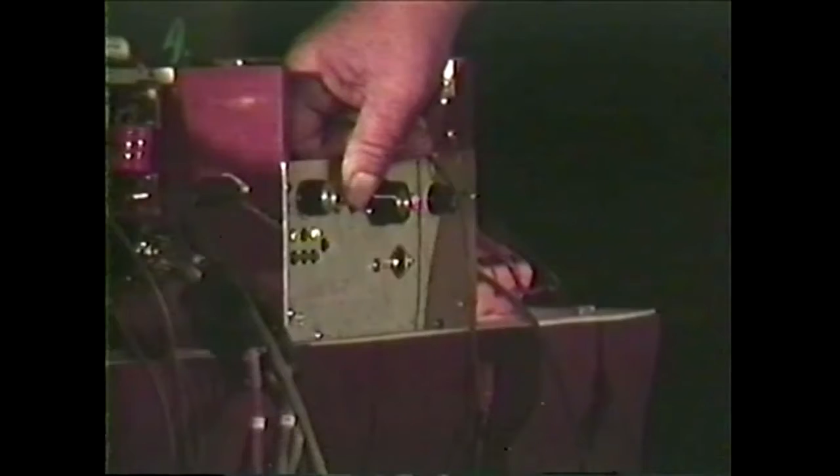And it will reverse at 6,000 RPM, but if it isn't bolted down, it'll jump up in the air 6 feet. I know, I had a neighbor come in and I had it running at 6,000 and he flipped the switch accidentally, and the motor was up in the air and I was catching the motor with it running and trying to shut this down at the same time. It wasn't funny.

Anyhow, with this design, there's no brushes in the motor. There's only 2 things in there to wear out, and that's the two bearings. The bearings I put in there cost $7.90 a piece, and they're 10,000-hour bearings. Now, in a car, how far would you drive in 10,000 hours? The motor is designed so the bearings are easy to replace without having to get into the working parts of the motor. It's not that technical.

I tried to follow the old saying, keep it simple, stupid. Well, I tried to make it as simple as possible. Ease of maintenance and maximum efficiency. And there may be better motors. And I can improve on this. This is my first prototype. I made a mistake in this one.

I wanted 49 slots in here. And the draftsman, the computer guy that's done my CAD work for me, he marked on the print 49 slots. I didn't count them. I faxed it off to Lamonics, and Lamonics made me 48 slots. And that's why it growls. If the 49 slots were in there, it would be as smooth as could be. So that's an error, and I own up to the mistake because I didn't count the slots.

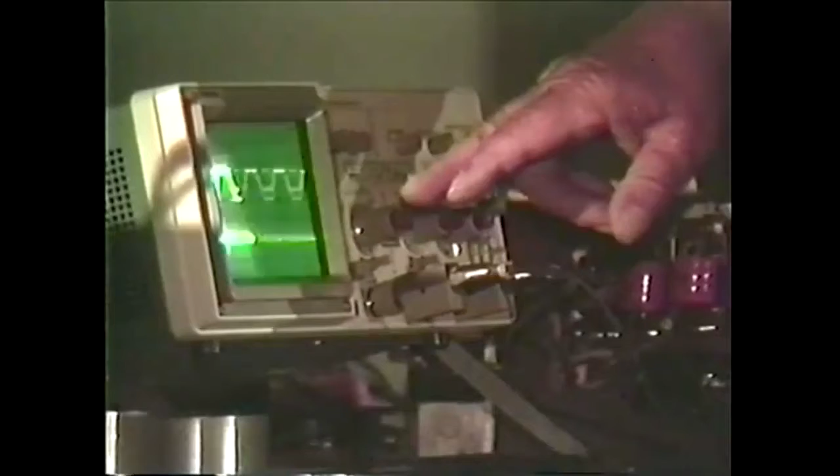Now, let's see here. Now this is on 50 volts per division. I'll bring this down to the line. And we're putting in about 80 volts now, that it's showing there. This line here is hooked across a .002 shunt. And I'm set on 20 millivolts per division. And so that is indicating the amperage going into the motor.

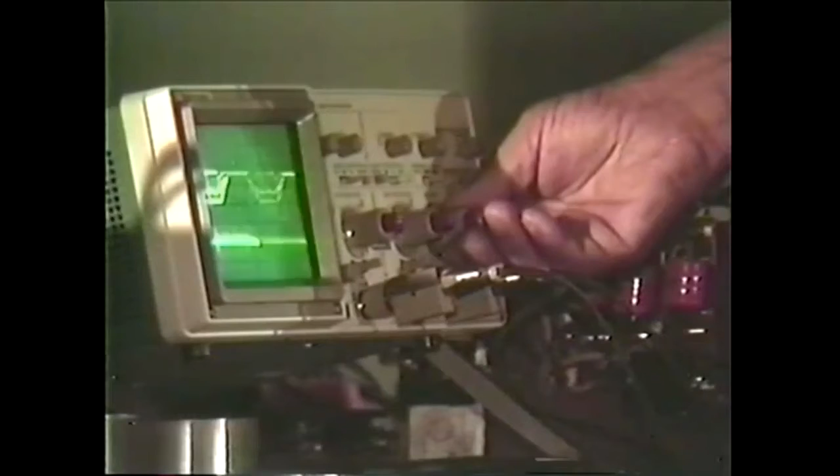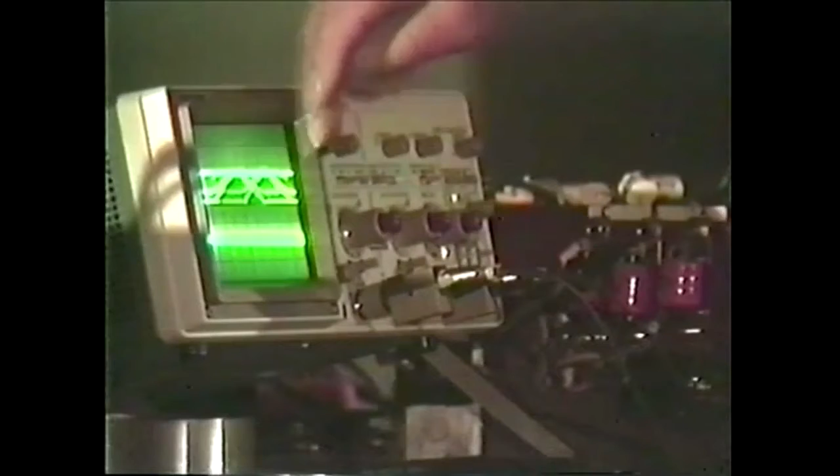Now, we'll turn this over here a little bit. Now you can see the little pulses I'm putting in. Very small amount of amperage I'm putting in. I'm getting as much back. We'll put this on 0. Get it as accurate as possible for the perfectionist. Now, these pulses that are going in are very short in duration.

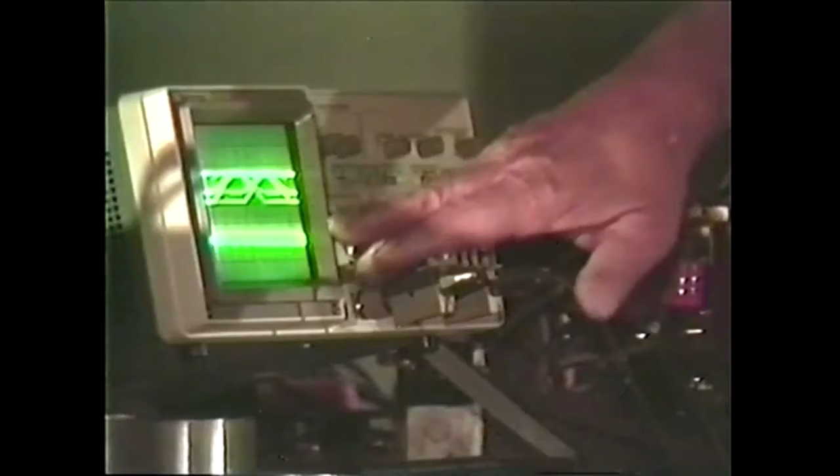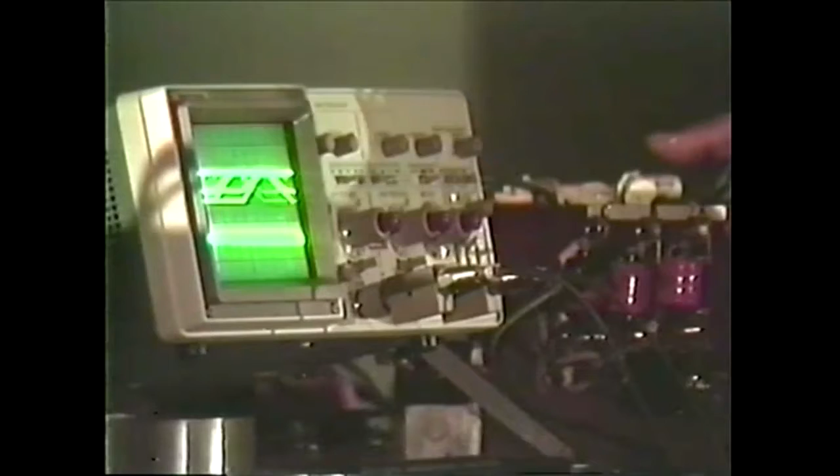These back EMF pulses down here are wider, actually, than the forward EMF pulses. Everything below the line, I'm capturing in these condensers here to use in the next pulse, so that I don't need to take quite so much electricity out of the battery.

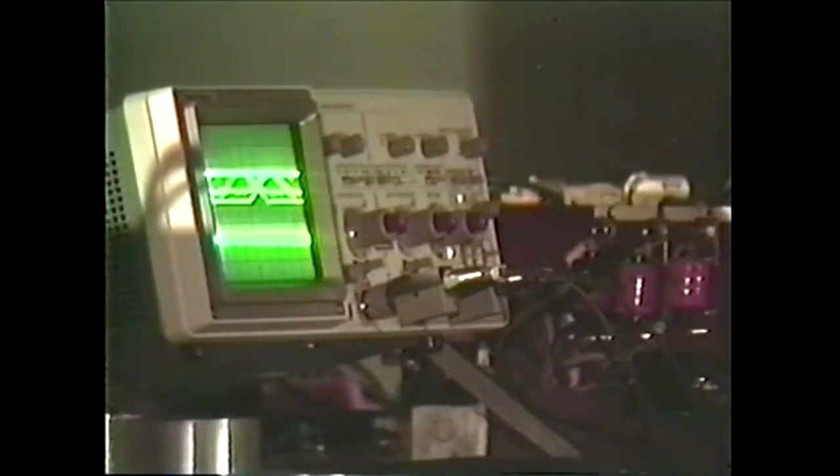Now, this motor is equally as good a generator as it is a motor. Now, I'm going to shut the power off going in. And you'll notice a sine wave, but the sine wave, as it slows down, collapses. And we're just hooked on to one phase of the three-phase.

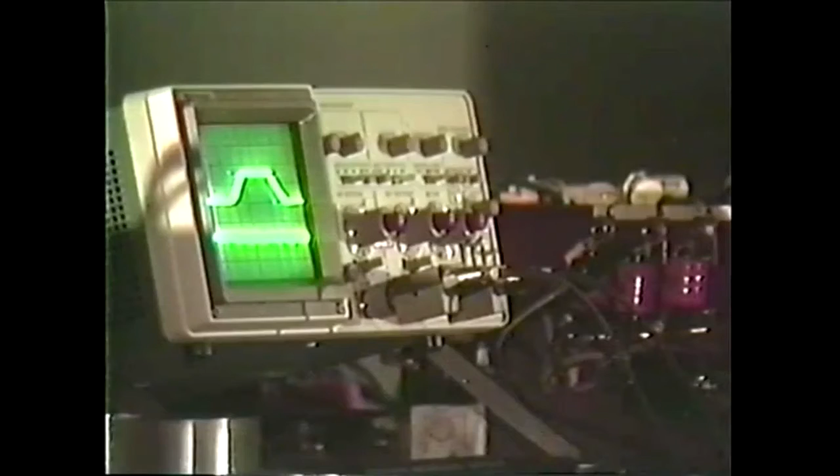Find a quiet speed so we can talk.

But I designed this basically for electric cars because of the torque. The torque is unlimited in instantaneous torque. It's there. I have run it long term for heating tests. I had a party that said, oh, if you put the power into that seal, see, it's sealed, airtight, no dust, no magnetic filings, nothing can get in there.

And I didn't have the shroud on it, and I didn't have a fan on it. I run it without any cooling, with 2100 watts going in for 4 hours, and it was still cold. It does not heat. But it looks nice with the cover on there, and it keeps something from bumping my Hall effect switches on the back that control this. In the finished product, it would be built a little bit neater than that. As I say, this is a first-time prototype.

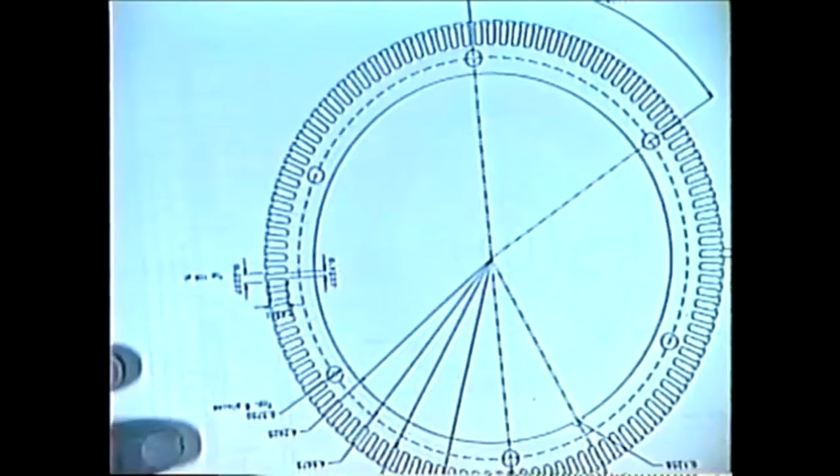So the less iron I can use and still have the iron... to get high torque you have to have some iron. An ironless motor, I've got ironless motors at home, have no iron at all. They run beautifully, they're very efficient, but they're not a high torque motor. They're like third horse, quarter horse, and they will work very nicely at that rate. But if I tried to go to a car motor, I have to have some iron to get the torque.

And to increase the speed, I reduce the iron to the minimum so that I don't waste energy. Anytime that you're going to shove energy into a piece of iron and you have to put more energy in it than is necessary, you're wasting something. And the other thing that I looked at in working in the Navy with submarines and all the different types of electronics, some of it was secret at the time.

Anytime that you can take X number of watts and make it do 2 jobs for you at the same time, getting from point A to point Z, and it does 2 jobs on its way there, you're coming out ahead. But if you take so much and do 1 job, and then you take so much more and do another job, when you can make the same supposed electrons do double work at the same time. So that's why I tried to make it as efficient as possible, get the mileage on electric cars up to 200 miles.

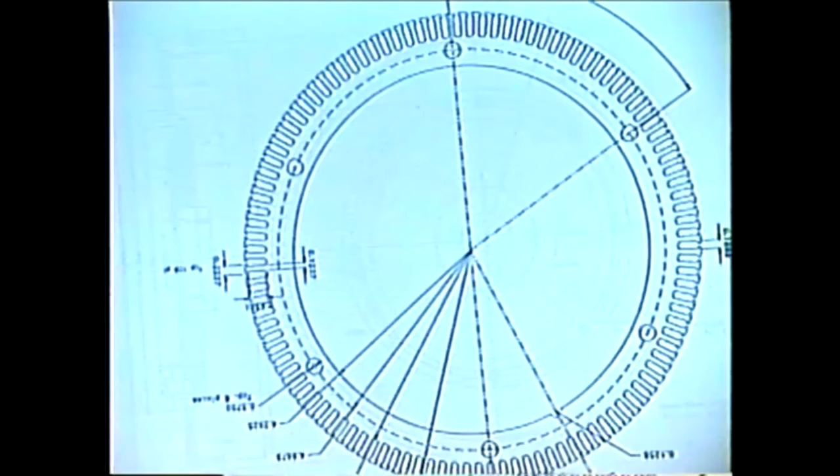There's a couple of innovations in this. The next one to build will be more efficient than this one. The 50 horse there is designed for very simple construction. If I want 100 horse, I take the same stator, wound left hand, and it goes in the same motor. All the parts are universally designed so I can have a 50, I can have 100, or I can go to a 200, using the same stator plate. I don't have to make a multitude of different sizes, like this design here.

I can wind this to get 10 horsepower. But if you want a horse and a half, why, boy, we can make it super efficient at a horse and a half, same size frame and everything. And it's not any bigger, and it's not as heavy as a conventional horse and a half if you went and bought one.

So we don't have to have so many different models, having every one of them different. And as I hate to see waste, I have rewound this motor at least a dozen times to do tests. I can wind it for 12 volts and it'll turn 6,000 RPM on 12 volts. If I put 24 volts on it with the same winding, it'll turn 10,000. And I have run it over 12 several times. The way it's designed, it's not going to fly apart.

I took it to Portland and put it on a dynamometer, and I got up to 3,500 RPM, and I'm going to kick it up a little higher. "Oh, no, it'll blow up, it'll blow up." And I says, I've turned it 10,000, it ain't going to blow up. I finally found out that his dynamometer would have blowed up. He didn't want me to turn my motor any faster, but I knew that 10,000 wasn't going to hurt it. And so then he conceded that he didn't want to blow up the dynamometer.

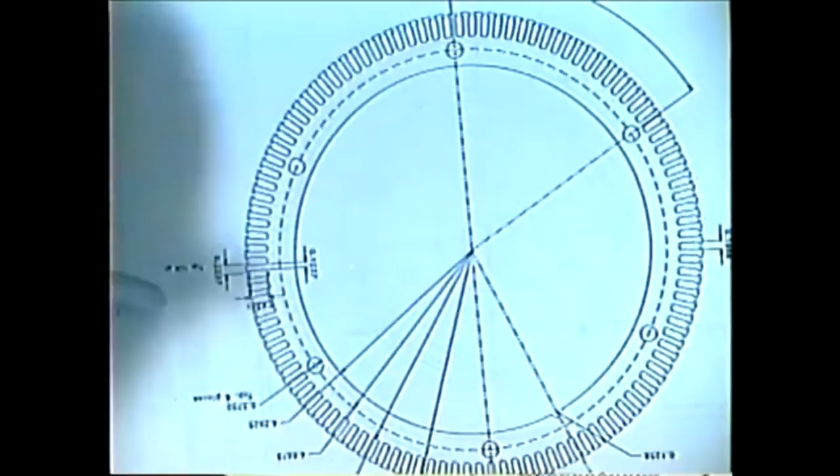Now this is the stator plate like I was showing you here, only this is the 49 slot. Where in that one I had the iron coming into here, I cut back on the iron because I found out I didn't need quite so much. I could get by with less iron between here and here and still have stability. I think we got a cross section there of this motor, and also one of the 50 horse. Now that's a cross section there of this motor here. There we go, by George.

Now, something that a lot of people don't know. I spent a considerable amount of time building Ecklinators. I invested $20,000 into John Ecklin's, I called it his folly. It was his dream. And John Ecklin was a brilliant man. He was a theorist. He never built the motor. We built it. It did not function quite like he thought it would. And I give him credit for being a good, sincere person. But he never built one that worked.

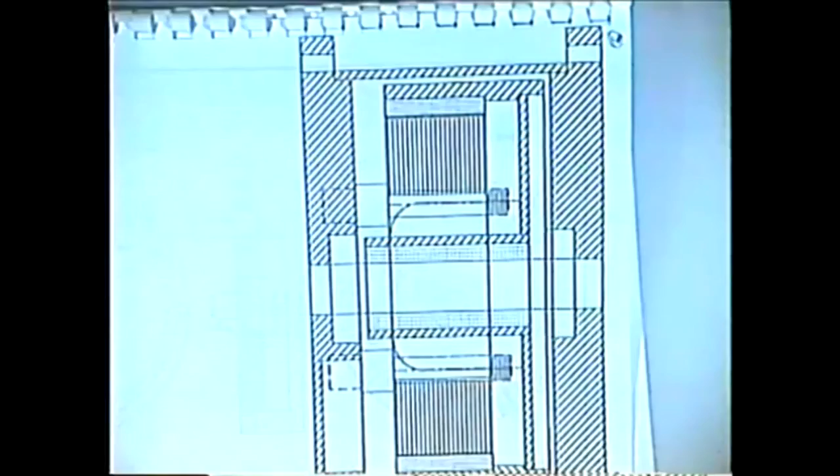And there were a lot of us, not only me, but a number of other people, who put a lot of money into Ecklinators. But I went a little farther. I got Hall effect switches, I got XY recorders, and I plotted the magnetic fields in the iron. What happens when this charge goes in? What happens when the power comes off? And we made charts and more charts.

And we found out that the magnetic field doesn't quite behave like everybody thought it did. Depending on the kind of iron you use, you can alter the behavior of it. We found that we could bounce magnetic fields off of magnetic fields, and they would expand and contract this way at the same time. And so we learned a little bit from it. So I don't dislike a gentleman that was working with me. He says, we wasted a lot of money.

And I said, well, look at it another way. If we went to college for 8 years and paid the tuition and everything to learn these things, we would have wasted a whole lot more. So we're paying for our education. And we're learning the hard way, but we learned.

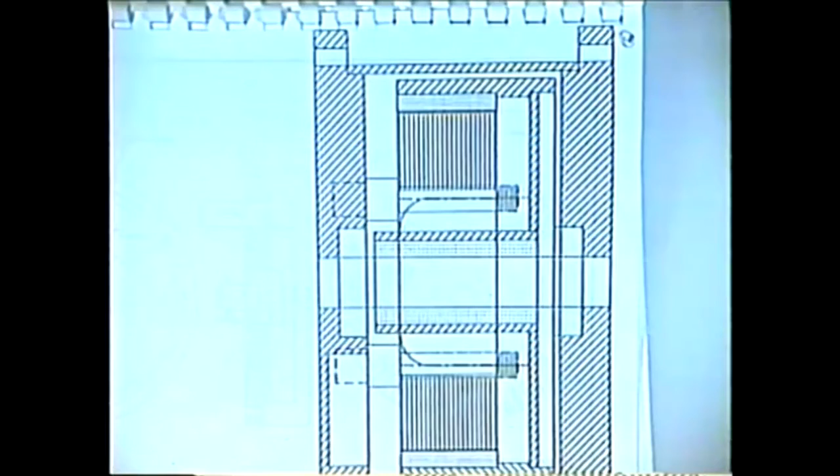And the Kato generator, for those of you that don't know a Kato generator, they are a brushless generator, one of the best type generators built for industrial use. The beggar's that big around and that long, and it puts out 37 kilowatts of 440 three-phase or 220 three-phase or 118 three-phase. I can get any voltage I want, and it's all three-phase.

And the reason I bought it is so that I could put a motor like this on it, and I could have three-phase power for my milling machines and everything, because the power company doesn't have three-phase power available where I was at. I'll be honest why I bought the generator. But it made a good test load for this when the gentleman that I was dealing with at the time wanted to know if it would get hot, how much power I could put in it, and what temperature rise.

So I put the temperature gauges on it, and I loaded it, and I let it run. And it never got any warmer in my hand in 4 hours of running.

And I think that... I can see right down the eye of that camera, and this is trying to blind me there. I was just being funny. I think we ought to take a little break here, and then we'll come back and answer what questions we can. You know, I'm normally not a talker, and it's awfully hard to try to get everything said and answer as many questions as might come up as I can. I like to build things, but I don't like to talk about them very much.

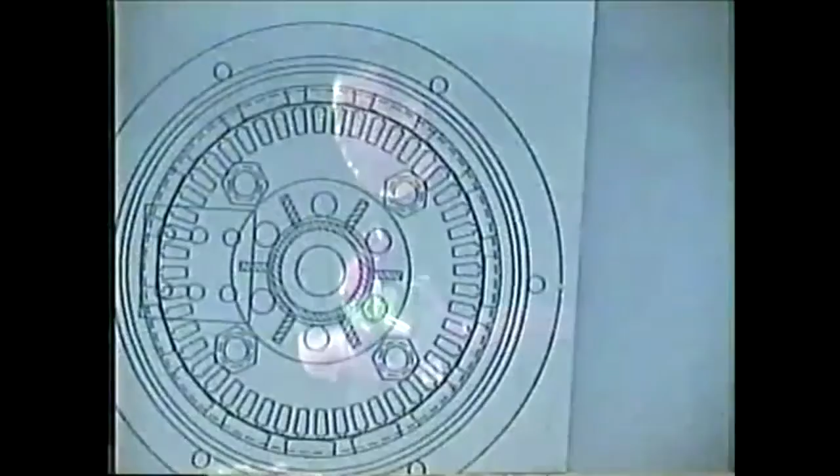It may be interesting someday to run it up, increase the RPM till the point it fails. But I'm very confident that 20,000 RPM wouldn't hurt it.

Go ahead. Yeah, Ron, how did you fasten the magnets to your cylinder? Okay, in fastening magnets, there is a company, I'm trying to think the name of it, that makes a bonding agent especially designed for this. With the bonding agent you cannot get them off. Once I put them on, there's only one way to get them off. Right now, in the motor, I use 350 degree bonding agent. And the magnets are good for 600 degrees before they lose their magnetism.

So I can put it in my milling machine, and I got a hook deal that hooks onto the magnet, and I can take my torch and warm the outside and the magnet will slip. And it doesn't heat it enough to hurt the magnet. But I have also got the bonding agent that will not release till it gets to 600 degrees, so if it ever got hot enough to release, the magnets wouldn't have any magnetism anyhow. Okay.

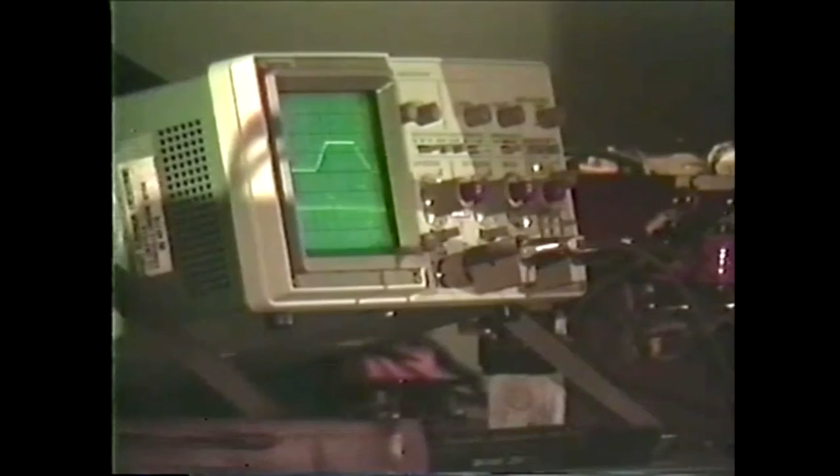Now, somebody asked me to run the motor again, so I run it again. And it has a definite little sing of its own. But right now it's turning at about 3,800 RPM, because I have it wound at the present time to run up to 200 volts. And at 200 volts, it'll go over 6,000 RPM right now.

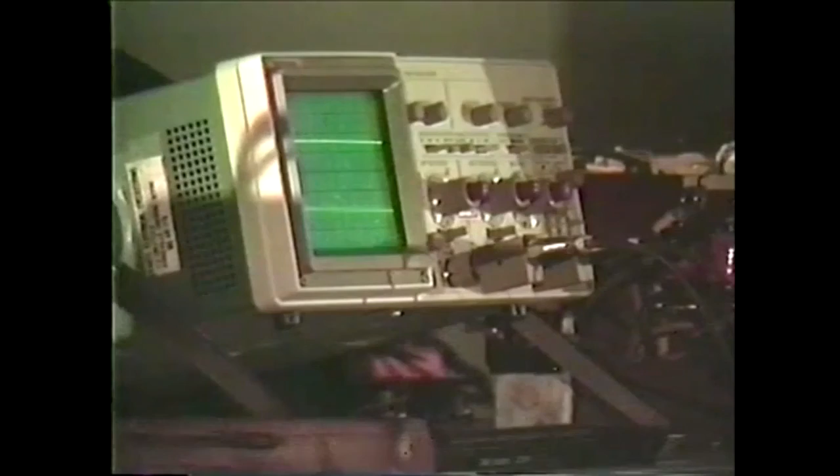Ron? Yeah. What horsepower did you say this motor was here? I designed it for 10. We checked it on a prony brake horsepower to a stall, and it stalled at 27. That's pretty good. So the torque is there. And that's what I was designing for, was to get that quick torque for a car. I mean, if you want to move out into traffic, you don't want to sit there and have somebody ram you. You want to be able to move for a few seconds. That's why it's designed for that.

And for those few seconds, it will draw a humongous amount of power. That's why these transistors are 300 amp, 600 volt capacity, to give you that when you need it. But when you're driving, you won't be using it. You won't be drawing very much current.

Just a real quick one. The signal that you're using, is it a pulse width modulated signal? The brain in here has a pulse width modulator, and then I got another little brain in there that is a speed sensor. Could you apply the same technology for conditioning the back EMF back into your condensers for driving solenoids and so on? Well, it seems that the back EMF comes back at just about the speed of light. And I'm lucky to catch it to keep it from damaging the transistors. So I put it in the condensers and reuse it.